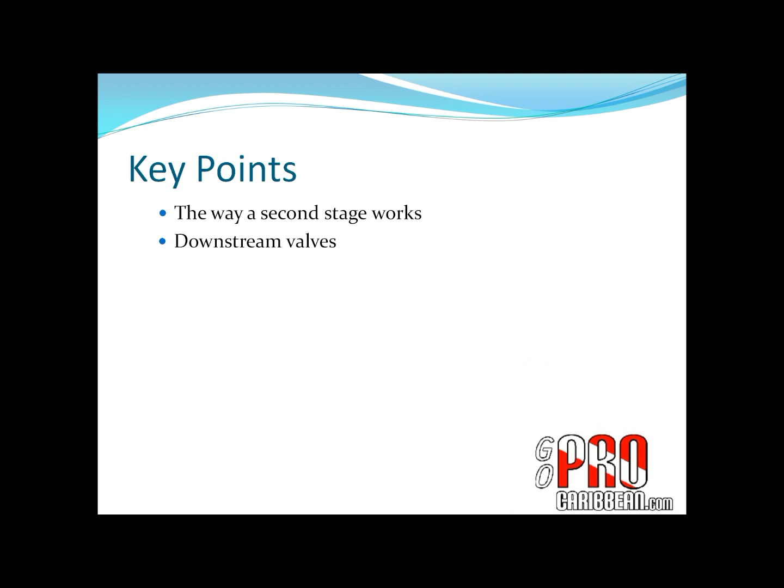In this presentation we're going to look at regulator second stages and how they work, everything you need to know about regulator second stages to be fully prepared for the PADI Divemaster and Instructor exams. What we're actually going to look at is the way a second stage works, downstream valves, pilot valves, common second stage problems, and the different types of second stage.

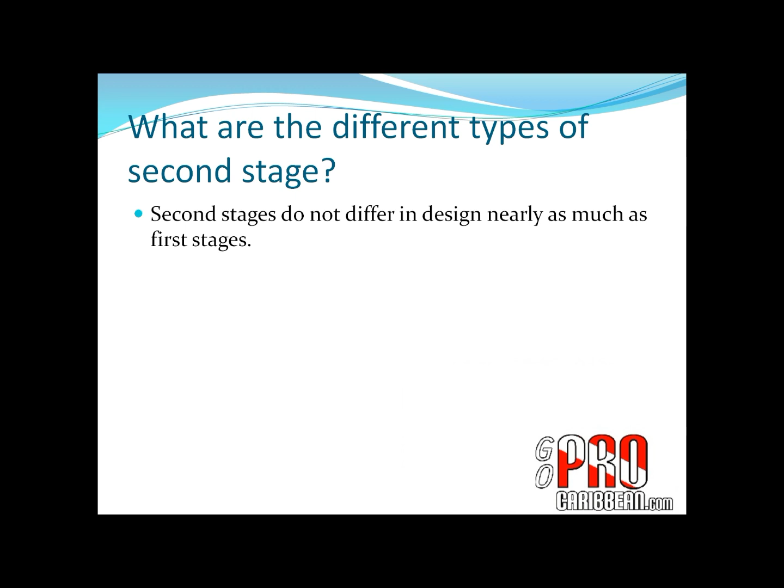Second stages do not differ in design as much as first stages, I would argue. Most differences are purely cosmetic. Pilot valve second stages are probably the biggest difference - that's the exception to the rule I've just stated. A pilot valve second stage is pretty different to most of the standard second stages you might come across. The difference between a balanced and unbalanced second stage is not nearly as significant as it is with first stages, in my opinion, but balanced and unbalanced second stages do exist.

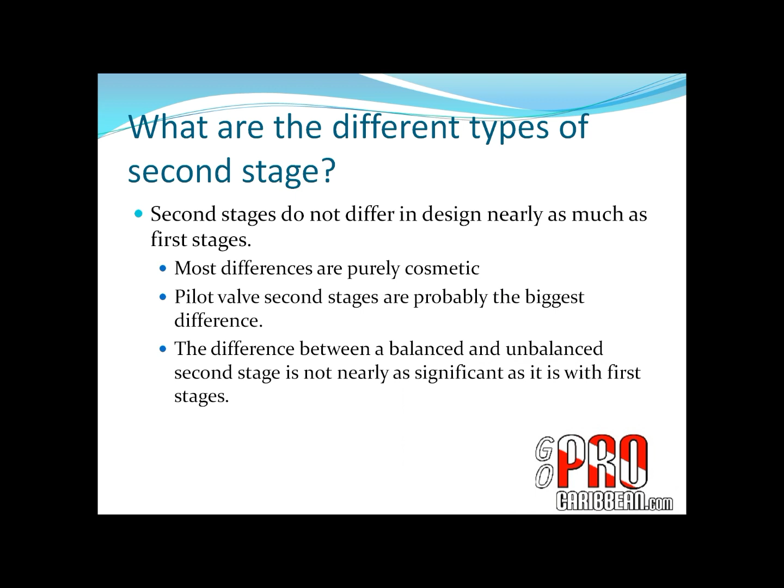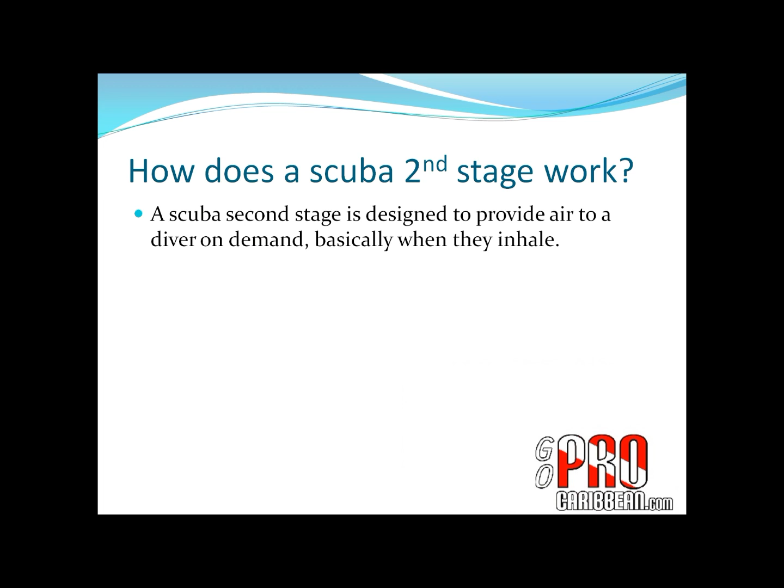How does a second stage work? Point for your notes: a scuba second stage is designed to provide air to a diver on demand, pretty much when they inhale.

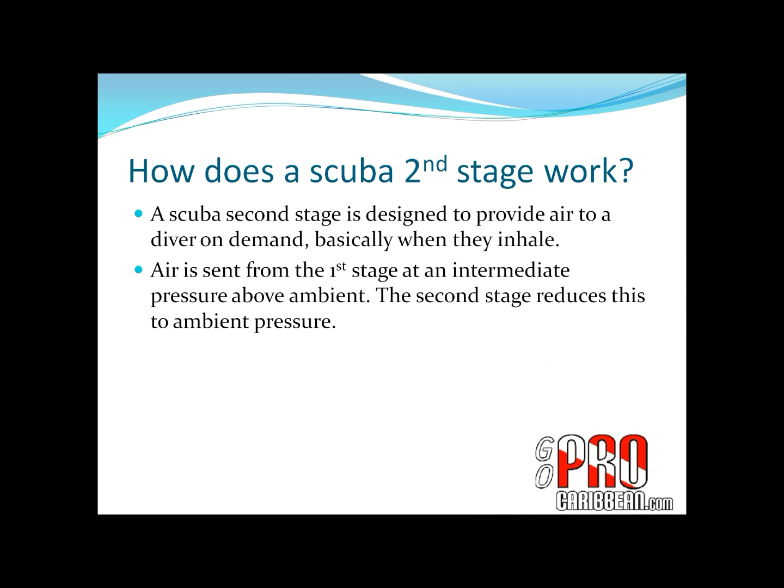We already know, if you've watched my video on first stages, that the first stage delivers air to the second stage at an intermediate pressure above ambient. The job of the second stage is kind of in two parts. It reduces this intermediate pressure above ambient to ambient pressure, because the human body needs to be breathing air at a pressure equal to the pressure surrounding it. The other job it does is to deliver air to the diver on demand.

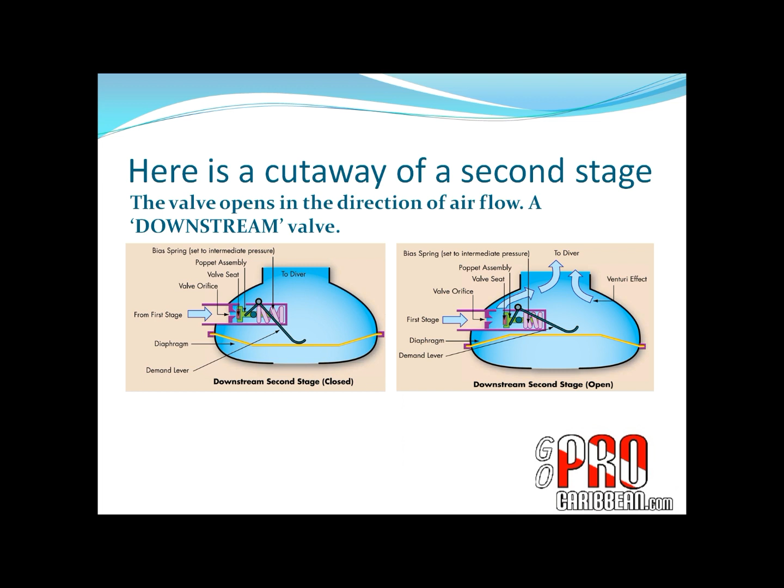Looking at this second stage, we have the various parts of it labelled. What I want you to focus in on is this part here - the valve orifice, and the valve itself, the part that actually moves to open and close the valve. What I want you to pay attention to is the direction in which this valve opens to provide air to a diver when they need it.

With this valve in the open position, with the air flowing to the diver, we realize that the air is flowing from the first stage in the direction I've just drawn this arrow, and when the valve opens, it opens in the same direction the air is flowing in. It is what we refer to as a downstream valve - it opens in the same direction that the air is flowing into it from the tank.

Now what we need to focus in on is this spring here. This spring is what closes the valve when the diver is not inhaling. So we have the pressure of the spring working upstream, working against the flow of air. We actually have the ambient pressure working to help close this valve as well.

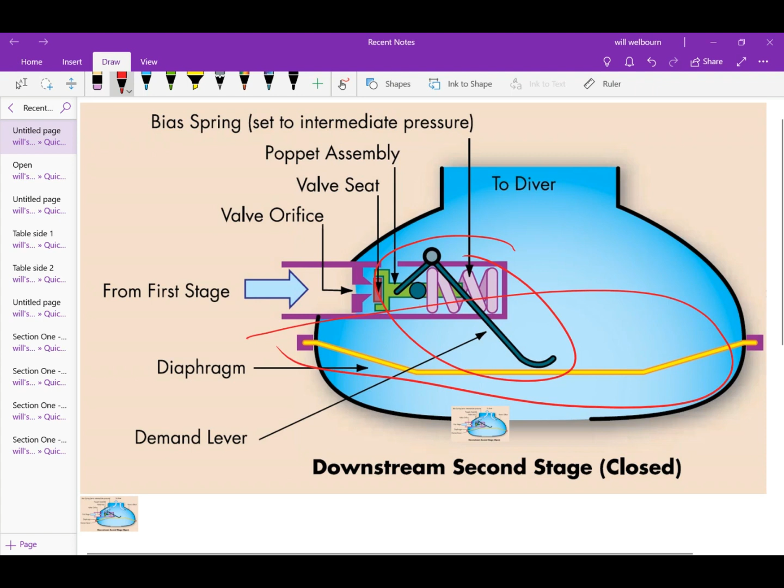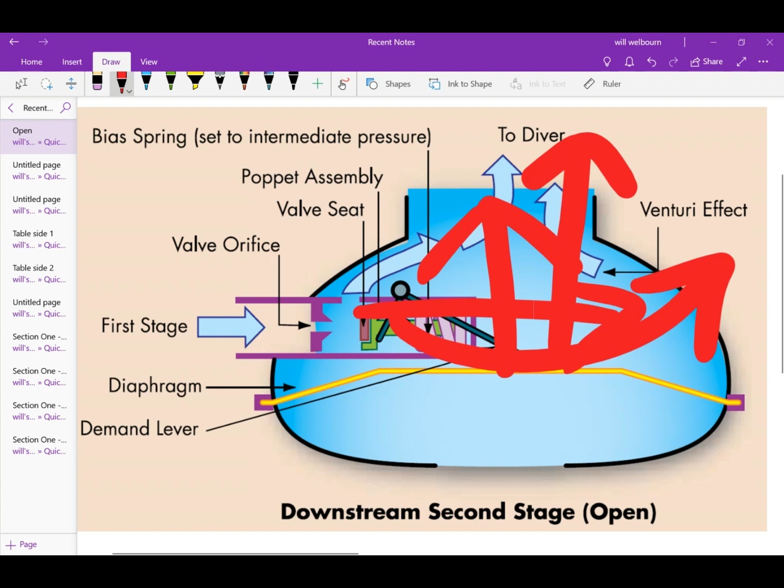Looking at it in the open position, imagine a diver inhales, and that is going to suck the diaphragm inwards. That diaphragm is going to push against the demand lever, and looking at how the demand lever is set up, when it moves up, it's going to be pulling against the valve. It is attached to the valve, and the valve is going to be pulled into the open position. So inhalation pulls on the diaphragm, which pushes the demand lever, which pulls the valve open.

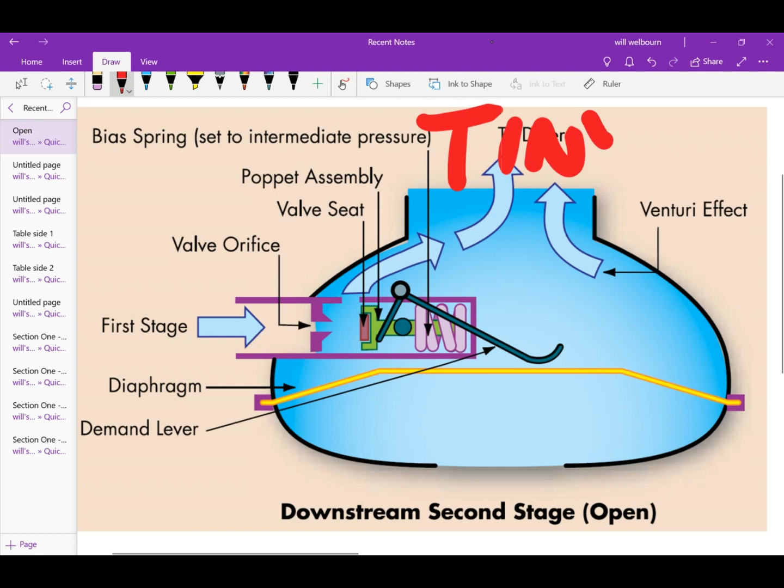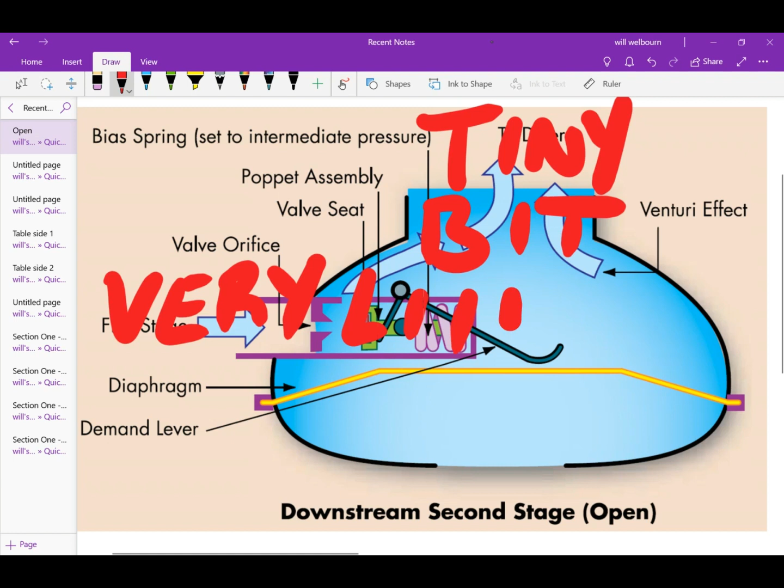As long as the bias spring is set to a tiny bit over intermediate pressure, only a very small amount of inhalation effort is required to pull that valve open against the spring. If the spring is set significantly stronger than intermediate pressure, significantly more inhalation effort would be required, which is why when you have a regulator that is difficult to breathe from, it probably needs retuning or reservicing, so the second stage can be better tuned to the first stage, reducing the inhalation effort required.

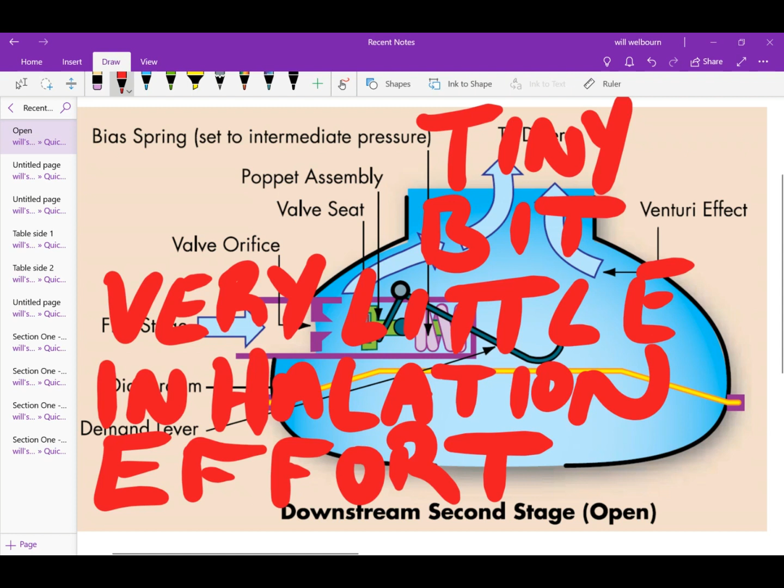Let's focus in on what we mean by a fail-safe design. We can see that the spring pressure plus ambient pressure is trying to close the valve, and intermediate pressure plus ambient pressure are trying to open it. Spring pressure is set to intermediate pressure, or a tiny little bit above, so it is a finely balanced thing.

If that spring was to fail, which is possible since it's a fairly delicate part of the regulator, now we've only got ambient pressure trying to push the valve closed, yet we have intermediate pressure plus ambient pressure trying to push it open. The result would be that the valve would come open and we would get a continuous flow of air, which is what we want for it to fail safe.

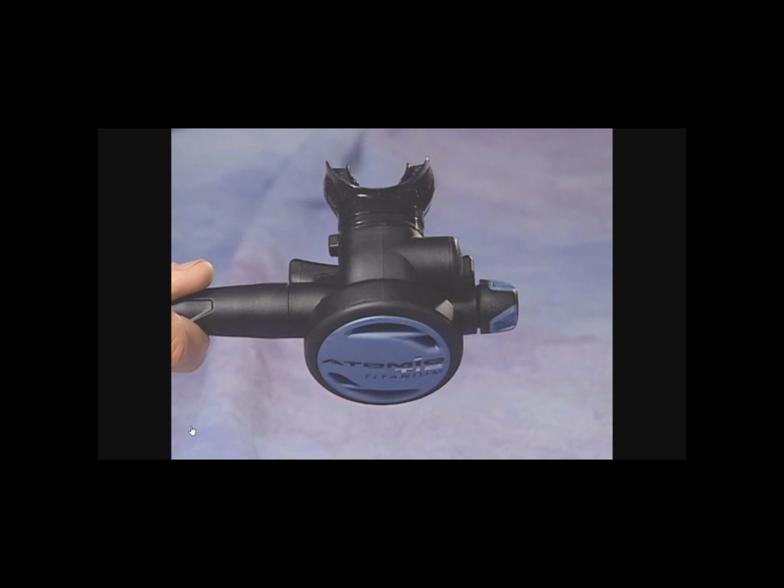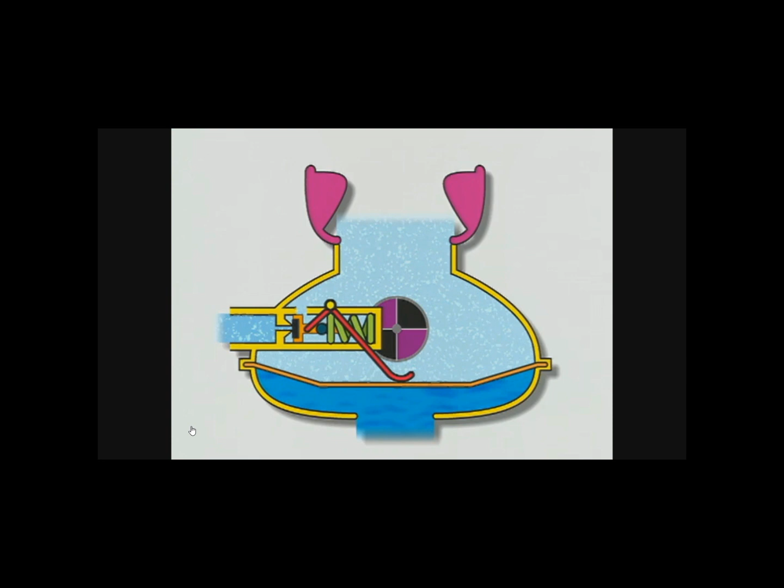Key things we need to know about regulator second stages, points perhaps for your notes. The downstream design of the valve, which we've now looked at, is what makes the regulator fail-safe.

You may well see the word fail-safe in a PADI exam. What does fail-safe mean? It means it fails in a safe way. When our regulator is the thing that needs to provide us air underwater, if it was to fail, we want to make sure it fails and gives us a constant flow of air rather than no air at all. That basically means it has been designed so that if the spring that closes the valve was to fail somehow, then the valve would fall open.

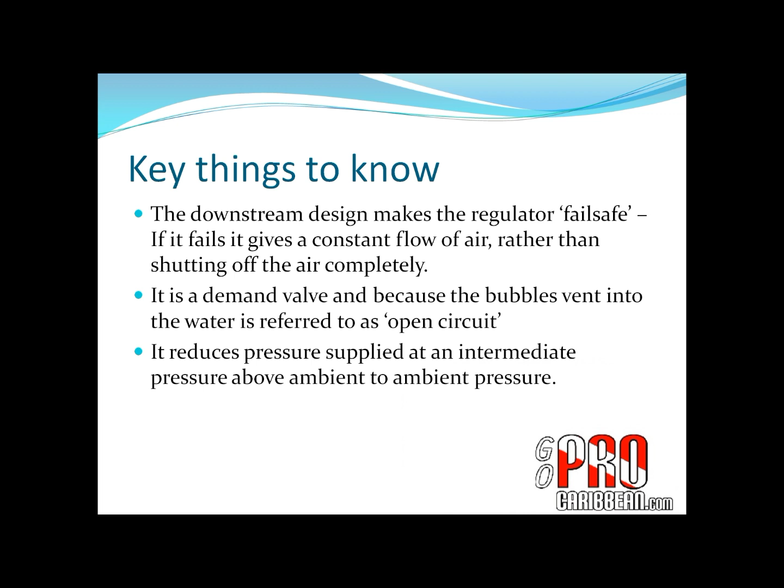A question on second stages mentions pilot valves, so I'm briefly going to explain what a pilot valve is and how it works.

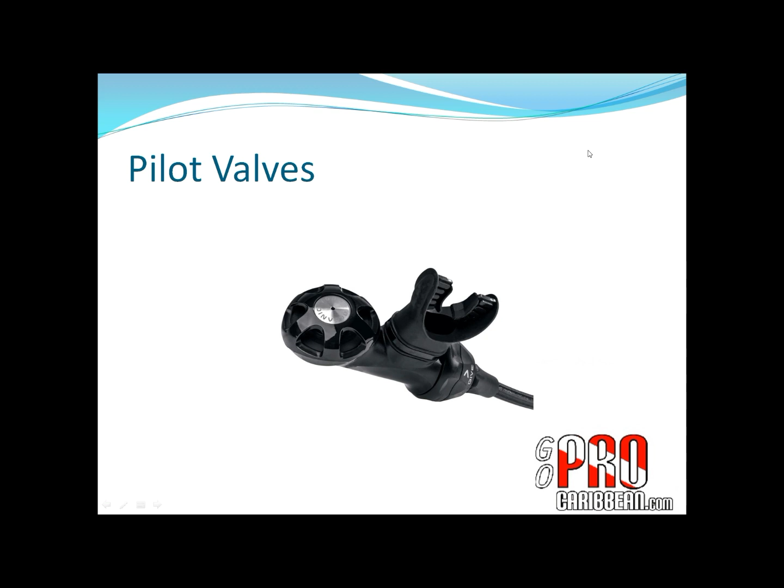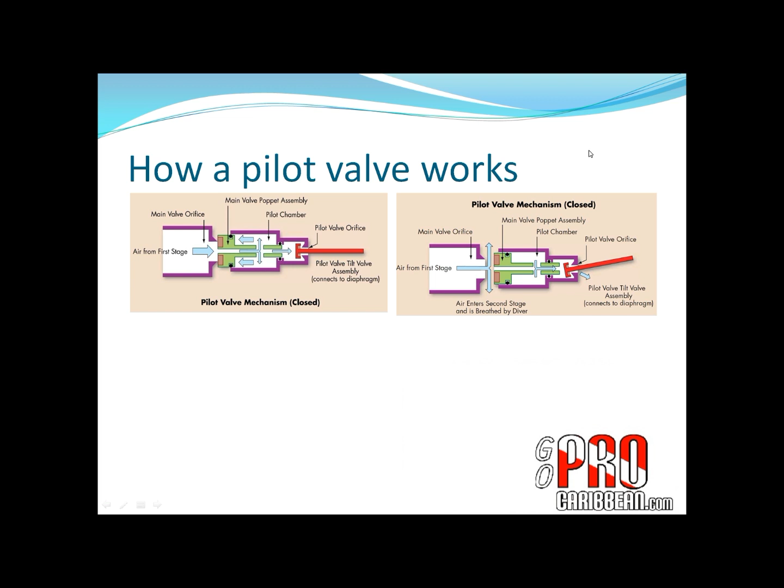Looking at a pilot valve second stage, what is missing here compared to the normal second stage we saw is a spring. There is no spring trying to push the valve closed. So we can see the air pressure that is coming from the first stage trying to push that valve open. What is it that's keeping it closed?

Well, air pressure is also able to pass down through the center of the valve and into the pilot chamber. That pilot chamber has the air that is now pushing against the other side of the valve. So the air is pushing the valve open, and at the same time it is coming through the center of the valve and pushing the valve closed.

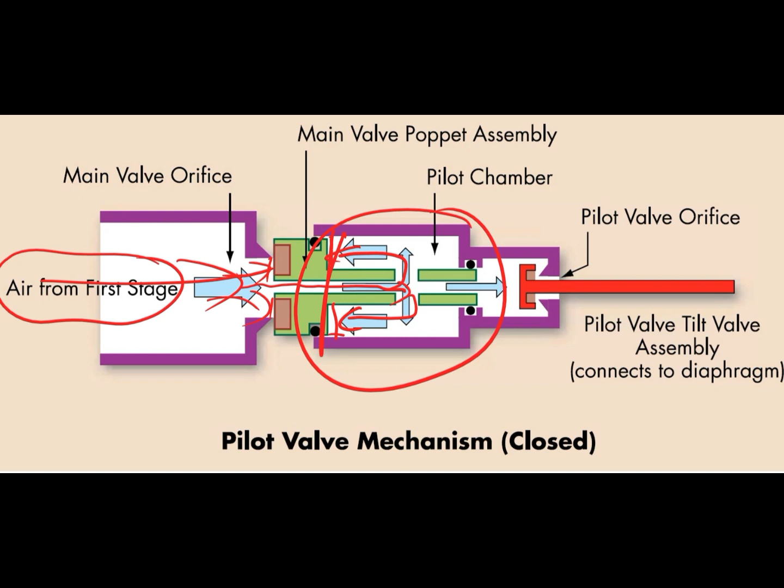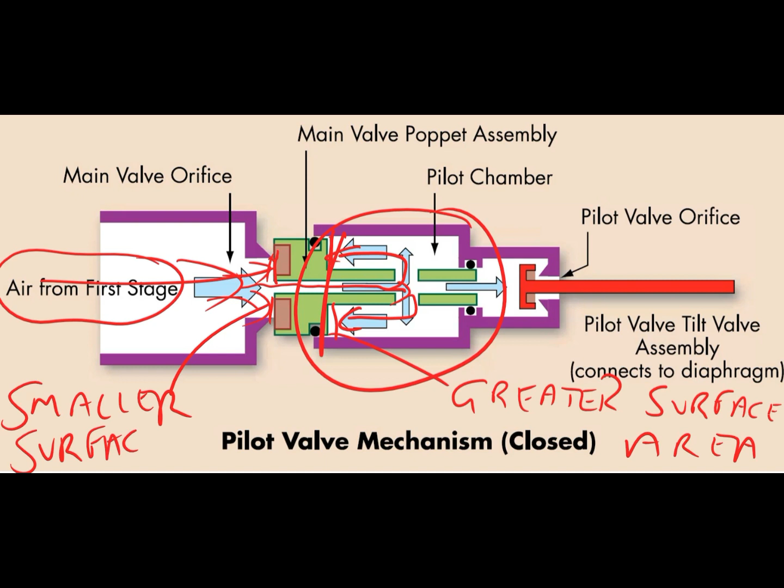Which is going to win? Well, that's going to be based on the surface area the air is working against. The air that is working against the valve trying to push it closed is actually pushing against a greater surface area than the air that is trying to push the valve open. So because the air pushing the valve closed is working against a greater surface area, it wins the battle, and the valve remains closed as long as that pilot chamber is sealed and no air is allowed to escape from it.

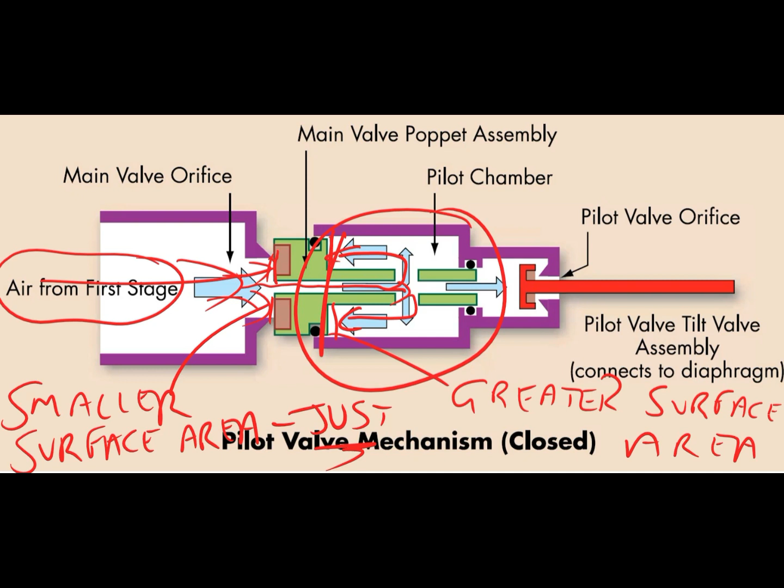So of course what happens is that when we want air to flow, when a diver inhales, we need the pilot chamber to have air escaping. So now you can see that that tilt valve allows air to escape from the pilot chamber, meaning the pressure in the pilot chamber will be less than the pressure of the air that's trying to push the valve open, and as a result the valve will indeed open.

Basically, you are very cleverly using the pressure of the air coming from the first stage to not only open the valve, but also to close the valve.

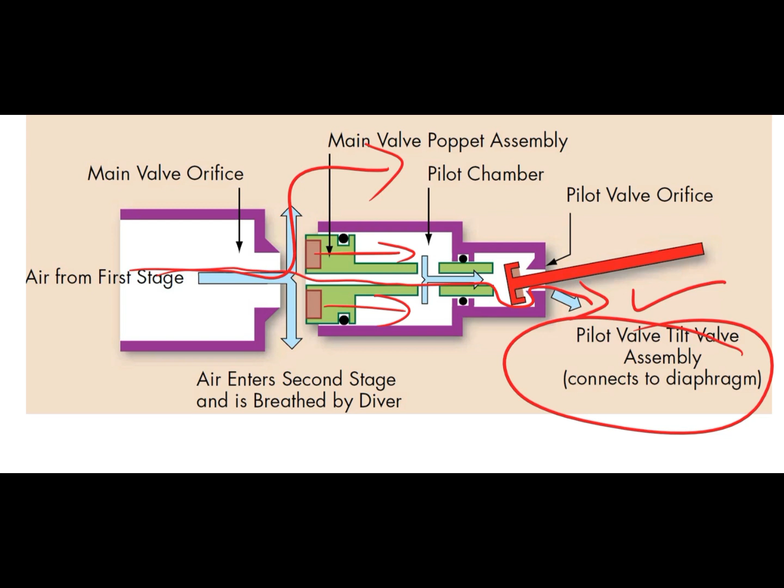What is going to make that pilot valve, tilt valve assembly move so that air can escape from the pilot chamber? Well, as you can see in the diagram, the pilot valve, tilt valve assembly connects to the diaphragm. And when a diver inhales, the diaphragm will move inwards and pull on this tilt valve assembly, making the air escape from the pilot chamber.

So I'm trying to draw here the diaphragm and something that is connecting to the diaphragm and connecting to the tilt valve assembly, so that when a diver inhales, it will indeed move that pilot valve, tilt valve assembly. And that is basically how a pilot valve works. What you really need to know is that when you see the word pilot valve, you know that we are talking about something utilized in a second stage, and it uses the pressure from the first stage to close the valve as well as open it.

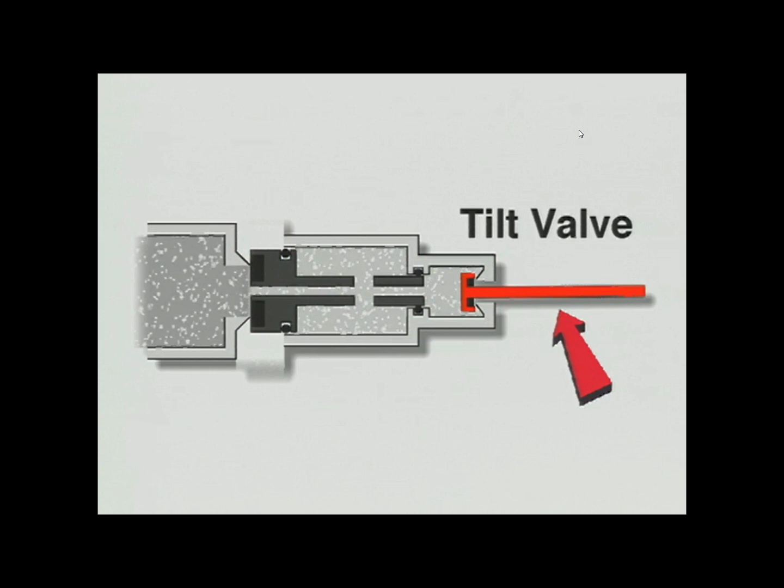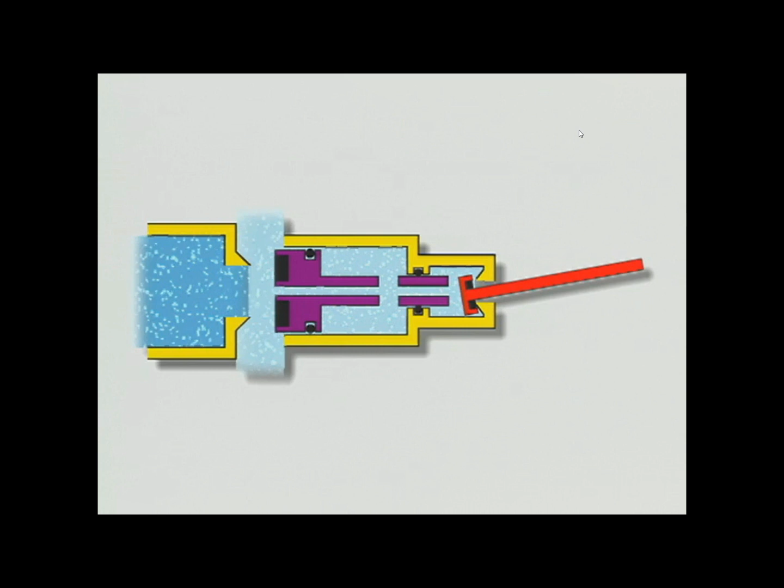The key things to know about pilot valve second stages are that rather than using a spring, a pilot valve second stage utilizes the pressure coming from the first stage to open and close the valve. This reduces the inhalation effort required when using a pilot valve second stage as opposed to a second stage using a spring. The downside is that they tend to free flow a lot more easily.

An awful lot more easily, in my opinion. I have tried using them on a few occasions, and quite frankly, I find them rather frustrating. And another obvious thing is that they are a lot more complicated to service. Basically, you can always identify the diver on a dive boat using a pilot valve, because they will probably be messing around with it, trying to get it to work properly, or they'll be the one who's always jumping into the water and their regulator is free-flowing.

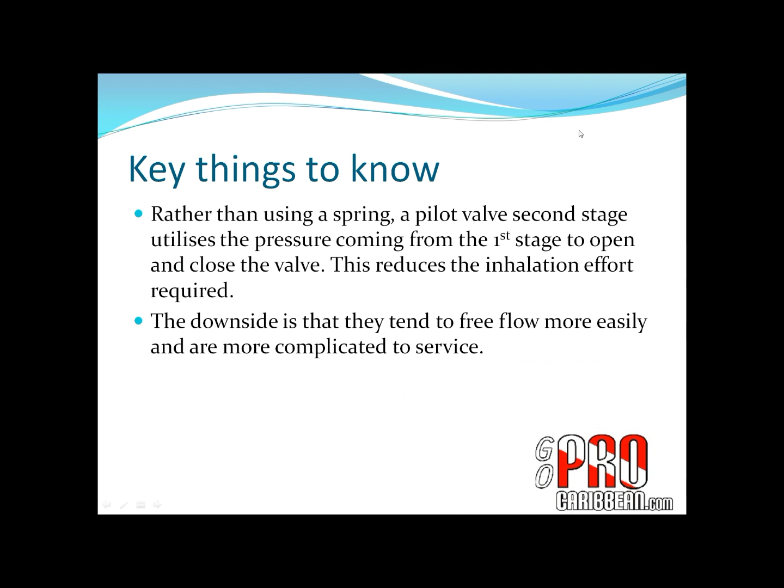Finally, I'm going to look at some of the most common second stage problems. This is something every dive instructor or divemaster needs to know. It's probably not tested much in the PADI exams, but when the seat of a second stage regulator, the downstream valve, wears, the regulator will start to free flow. It usually starts with a couple of bubbles, just a small trickle coming out of the second stage, and that's when you know the seat needs replacing, or in all likelihood that will be the cause.

The other thing you'll often hear people complaining about with second stages is when someone says the second stage is breathing wet. They're getting small, moderate, or even large amounts of water coming into their second stage with every breath. So what is the cause of that?

The most common and obvious cause to look for is the mouthpiece. Is there a split somewhere, usually where the mouthpiece wraps around the hard plastic body of the second stage? That is always the first thing I look for when someone complains that a regulator is breathing wet. A split mouthpiece is very quick, very easy, and very cheap to fix.

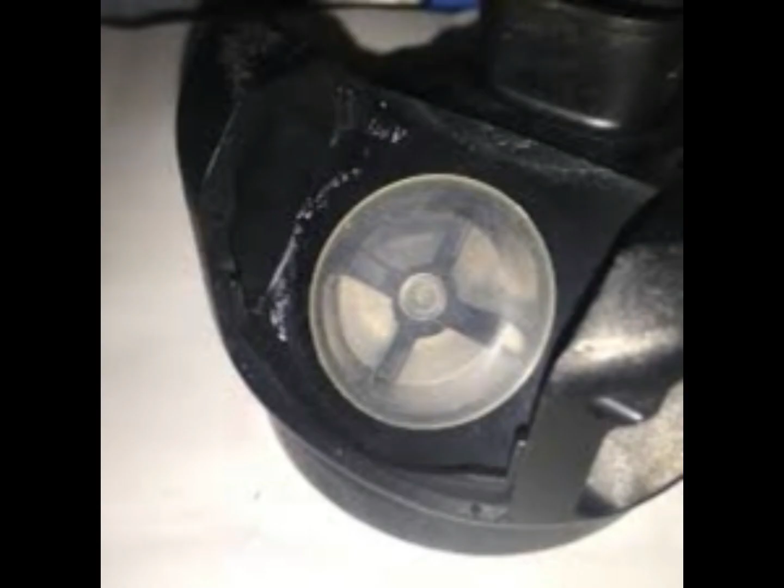If it's not that, the next thing I do is look at the exhaust valve. It may be possible to see this from outside the reg, looking in where the bubbles come out when you exhale, through what's usually called the exhaust tee. You should see a round or oval rubber disc that is normally closed, but flaps open easily when someone exhales, to let the breath escape. Sometimes these discs become folded over against the plastic body of the exhaust tee, and then, whether the diver is exhaling or not, the disc stays in the open position, allowing water to flow back into the second stage after exhaling.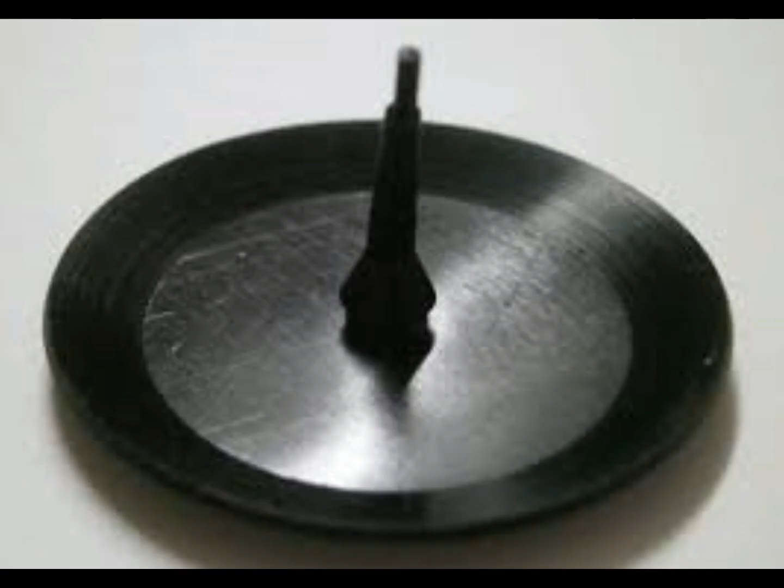Or it could be a bit of debris forcing the rubber disc to remain open. So always look inside the exhaust tee to see if that might be the cause of the wet breathing regulator. You may have to unscrew the front of the second stage and pull the diaphragm out to get a better view of the exhaust valve.

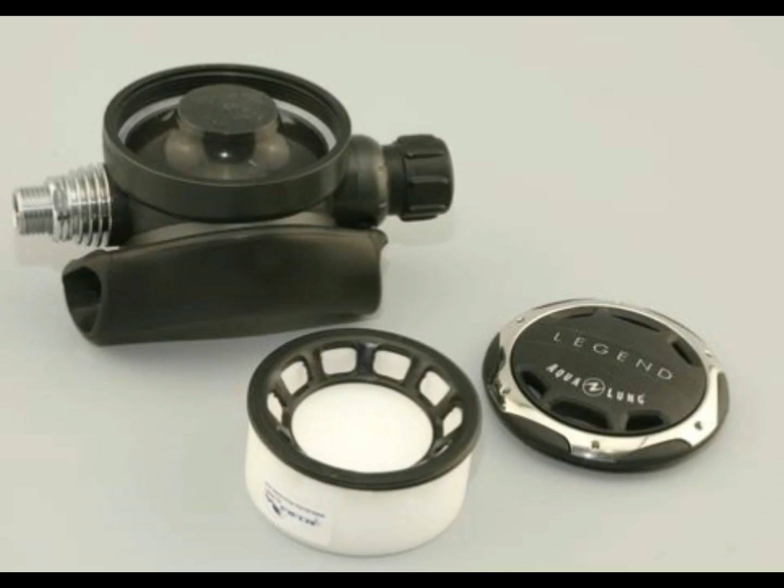It's often not very difficult to do, and it's a sensible thing to do if someone is complaining of a wet breathing regulator and you've already ruled out the mouthpiece. Because if it's not the exhaust valve and not the mouthpiece causing the regulator to breathe wet, then it's going to be the diaphragm. So you'll definitely need to unscrew the front of the regulator to look at the diaphragm for any splits.

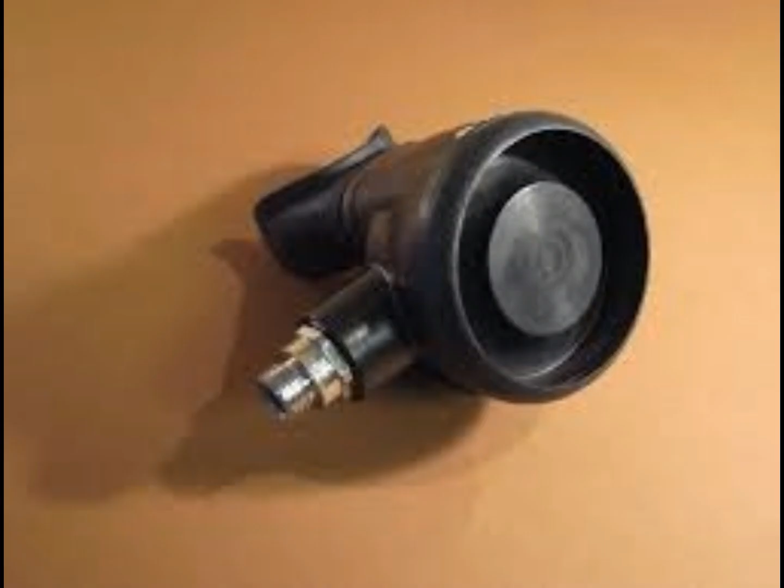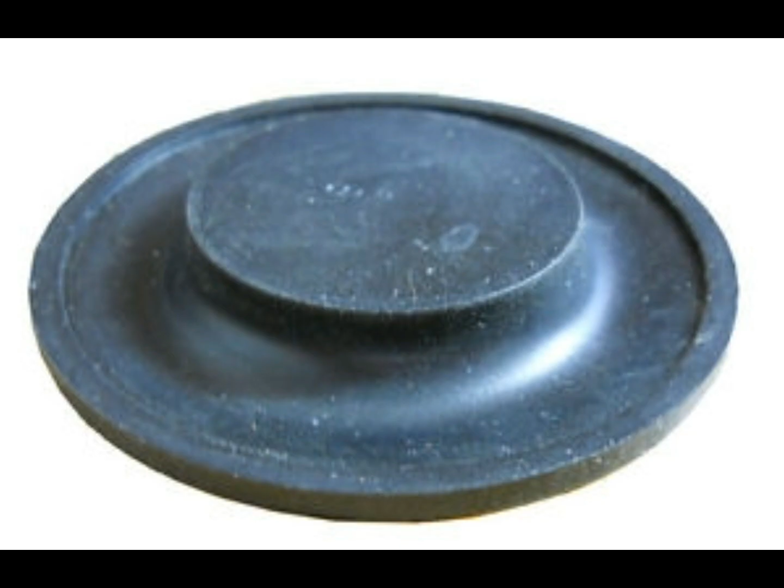Both the diaphragm and the exhaust valve are made of an incredibly thin piece of rubber, think of a balloon, so it's quite possible for them to split. Cockroaches also love to eat them, and that might be what's allowing water into the second stage, causing it to breathe wet. So that's some really useful information for a dive pro to help a diver who is complaining about a wet breathing regulator.